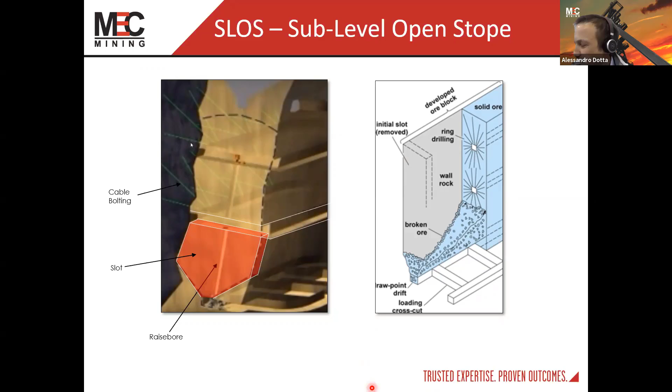So let's go dig a little bit more deep into the method. Let's talk a little bit about the ore body itself. So we expect when applying sub-level open stope to have a stable and competent rock on both the hanging wall and the footwall side of your ore body.

So we're talking mainly about medium to high strength. The strength in that case, we're talking about something higher than 70 MPa, if possible. Also low to medium stress regime, so that will collaborate when you open your stopes and don't have big issues with dilution and also unexpected falling of rocks or even collapsing.

Also, about the deposit angle, we'd like it to be in the ideal range above 60 degrees, and that plays more on the inclination and exceeding your repose angle. So then you don't get into a situation where your ore is partially hanging on your footwall and having issues recovering, because then you could incur not just dilution, but also not have the expected recovery.

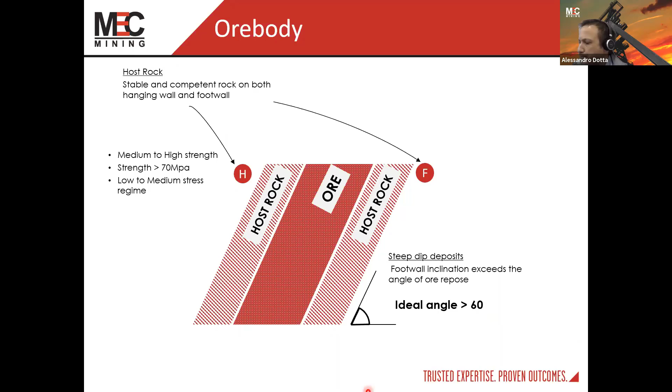So let's talk a little bit now about the ore body. Define a little bit more what we mean about the large size of the ore body. As mentioned, first it's a bulk method. So we expect to have a large ore body with a regular shape and well-defined boundaries as much as possible.

So we're defining here X and Y dimensions, but when we talk about those dimensions, what are the numbers involved? I'd say on the X axis, we're talking about in the order of 100 meters to a kilometer in length. That can vary, you can have multiple ore bodies, it depends on continuity as well. When we talk about the Y position, we're talking about tens to hundreds of meters.

And again, that depends on a couple of factors, but I'd say those should be the main dimensions to understand. The depth of the ore body is variable, because that depends at the end of the day on some geotech constraints and on your rock quality, because that will affect your pillar stability and primary and secondary stope size as well. So that can be said to be variable.

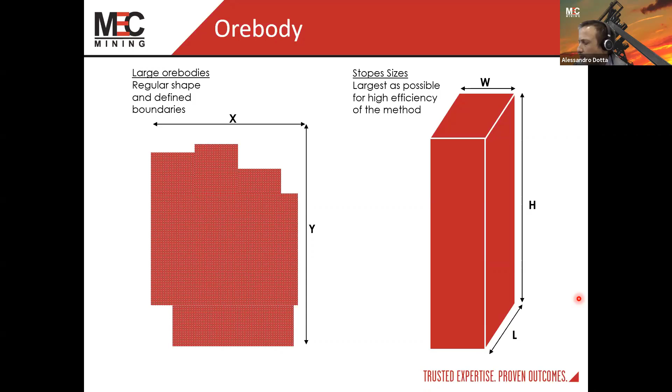But we can talk a little bit about the grade. This mining method you can do with medium and relatively low grade. You should expect dilution, again depending on your stopes, on the paste fill, fallings, or even boundaries. You have some waste and some internal structures.

Also, let me see what else is in here. Yeah, as you go deep with this mining method, we need to mention that your stope size tends to decrease, and that's just a factor of stability.

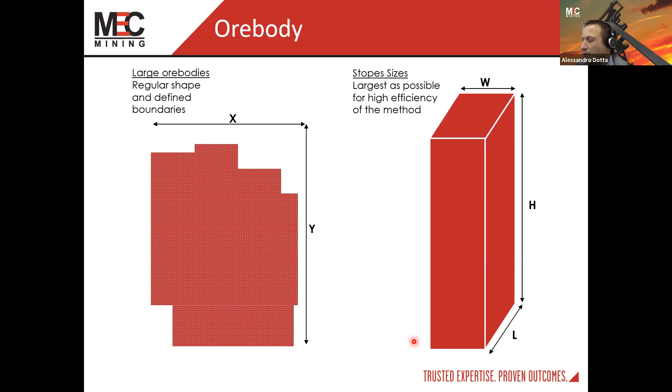So I'll put here a basic view. This is just for us to understand a little bit how the method applies. You'll find out there are a lot of variants for this method. This is by no means representative of the method itself. In the books you have a lot of variants, so you could have different pictures or different applications, but this one represents very well what we want to discuss today.

So initially, we are showing here some transverse stopes. Usually you will expect to have a slow start. So your initial blast on the slot, you're talking about like 1,000 tons or something on that order of magnitude. And as you progress, you have a bigger blast.

As the sequence goes, the method itself is more likely to be applied bottom up, but in reality sometimes you'll be required to do some changes, though that's not common. So then very quickly here, you blast the bottom, blast the top. Of course here it's implied that you have a slot, so we'll see that on the next slides. And then you keep progressing your method.

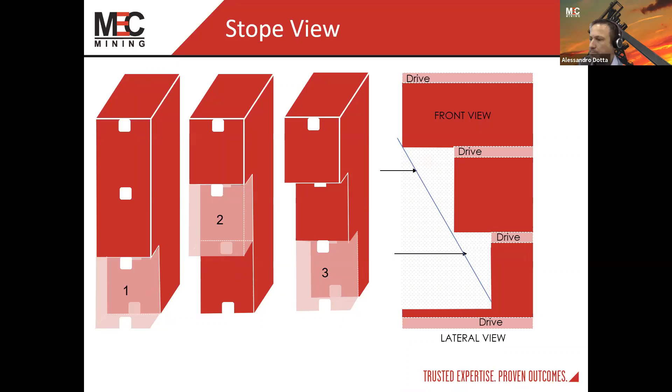What would stop me from going to 2 levels and increasing the height of your block? Look, you can increase the height. There are a couple of factors here, and I would say there could be some geotechnical constraints for having a bigger stope than what's really presented on the picture with multiple levels.

Another factor you need to consider is the drilling. As we go further in our presentation, you'll see that you have a limit. It's not the ideal limit, but I'll put it this way - you don't want too much interference with deviation from holes. But if you want to increase the distance between levels, you could consider a regime of drilling up and down holes. So you could eliminate the middle level and drill up holes from the bottom and down holes from the top. But again, you need to watch out for interactions in your timing and blasting.

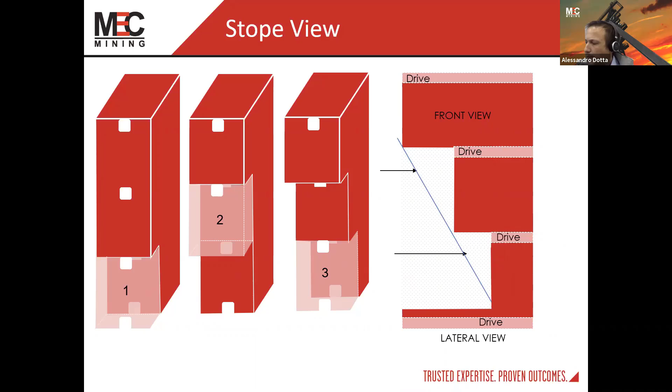Okay, all right, I hope the answer is okay. So let's go to the next slide.

On this one, we present a little bit of the magnitude and size of those slots. This is a real stope that has been mined. As previously discussed, we can see here the size from where you have your raise. In this case, we have one with a raise bore and the slot, so each one of the blasts - blast 1, 2, 3, and 4 in this case.

These are contained at the bottom here. So number 1, and I just have the picture of what's actually contained inside the slot. You see the order of magnitude, we're talking about 1,000 tons, 1,500 tons at most here.

When you go through the next blast, that'll be 5 and 6, you go to an order of magnitude between 18 to 20 times bigger. Again, I'd like to reinforce that the reason for that is because you don't have enough void.

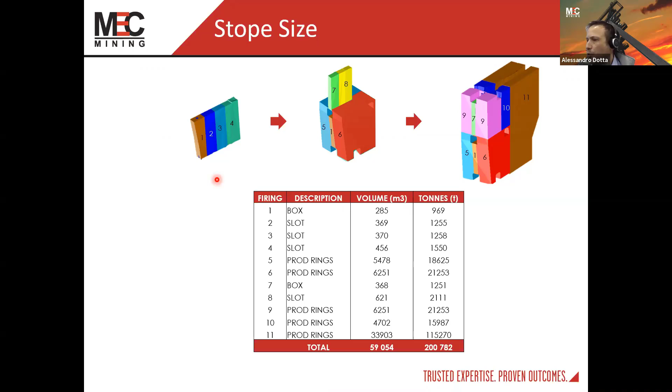So you need to create your void, and you need to be very careful while you create it. We'll be discussing the importance of your slots and how careful you need to be, so you don't jeopardize the extraction of your whole stope. You can have a couple of millions in revenue involved here, so it's better to go slow and respect those constraints than go too quick and jeopardize what's inside your stope, incurring time loss and loss of revenue.

So fire 7 and 8 here could probably be taken as a single shot because we have enough void at the bottom, so we'll be okay. Even 9 and 10 could be taken as a single shot as well. Look at the order of magnitude, we went from 1,000 to 20 times more. Then the final blast, number 11, the mass blast, we're talking about 115,000 tons in a single blast. That's very representative when talking about bogging, mainly free bogging. You can have very high production if you have multiple stopes online.

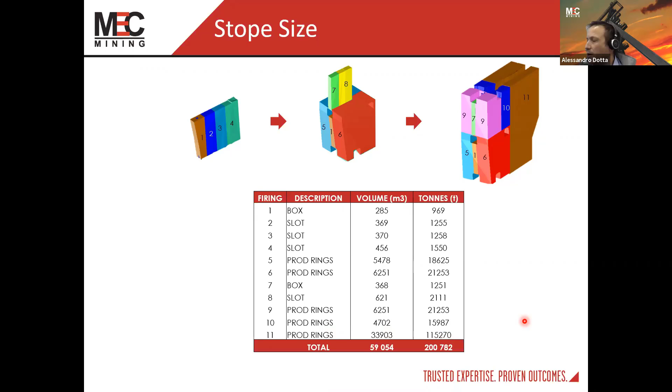Okay, so the next slide, I'll comment a little on the upsides and downsides of the method. On paper everything seems very nice, but sometimes there are things that are undesirable. Let's talk first about the upsides. As I mentioned previously, we're talking about free bogging ranging from 40 to 70% of the stope, depending on size and blasting directions.

It depends on pile formation, how you form that at the back of the stope, or if you push material to the front of the stope. So the stope tonnage, as in the previous picture, can reach easily above 100,000 tons, and that means a relatively low cost per blast. That depends on a couple of other factors. What would be the maximum tonnage? So there's a bit of outstanding ground competence and stability needed, which allows you to have the entire stope drilled before blasting, which is the ideal situation when you want to maximize your drilling stocks and blasting readiness.

Of course, there are a couple of factors to comment on depending on the material, when talking about your broken stocks. If you have high sulfides material, you can incur what people call in the industry 'cooking,' so your material can solidify again and you have difficulties removing it from the stope. But you also need to think about the coordination of the material you have on the ground, about the grades, how you move them to the stockpiles on surface, and how you treat them at the plant.

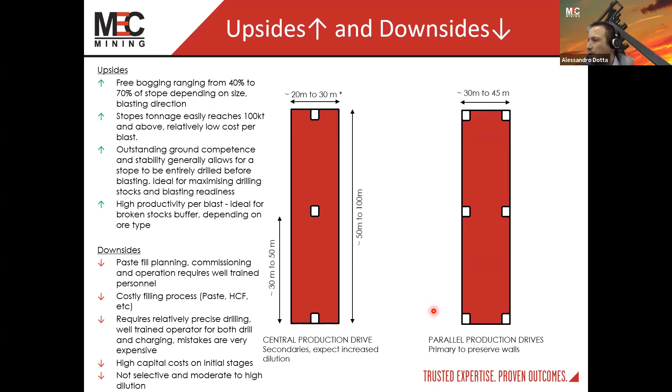So then you can almost double up the size, but not to that extent. It depends a little bit on the angle of your drill hole, but that's the main reason for that. Okay, going to the next one.

Let's talk a little bit about dilution. Dilution can be a really big factor in this mining method application. I'd like to focus on two main things here: the planned and unplanned dilution.

When we talk about planned dilution, we're talking about internal dilution, which we could see as internal waste. The stope shape also has some limitations that bring this internal dilution.

When you're applying this mining method, it's not all the time that we're mining massive ore bodies. Sometimes we're talking about mining multiple structures that carry grade, but between those structures you can also carry waste. That's the reason internal dilution can be a big factor, and you need to pay a lot of attention when talking about this method.

But in some instances, you can have issues with contamination. It's not all the time. Sometimes those boundaries carry some sort of mineral that is a contaminant, and that will not be good during the treating on the plants.

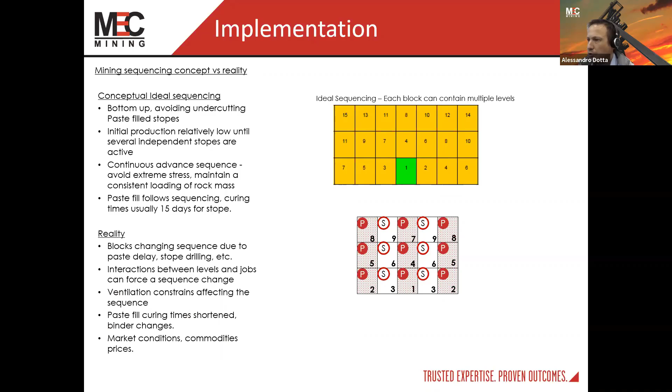Okay, so going to the next one - I'm going through a couple of technical challenges. I'll go a little bit quicker because I think we'll reach 40 minutes, a lot of stuff to talk about. But anyway, let's keep going through this.

So the stope average, we're talking about really about 12 tons per meter. This number, again, can be different - it can be very different, but this is the average between production holes and also slots. When we talk about production, we have about 16 tons per meter of drilling. You can have this number go even higher than that if you consider just your production rings - you can go up to 20 or even over that.

And then you talk more about fragmentation, so you can reduce a little bit how much explosive weight you need per ton of rock blasted. A couple of comments here about some factors regarding up holes and down holes, and that's the reason why I didn't comment on everything back there.

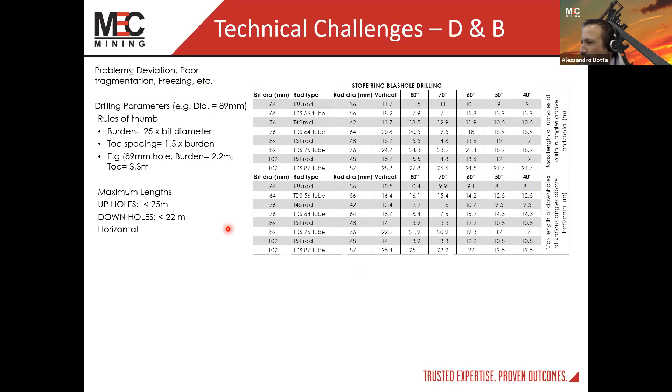But always remember to be very careful and analyze your results as well, your fragmentation, and ensure you're not changing too quickly, because you can go from a perfect shot to a frozen shot. Okay, so let's go to the next one.

So let's talk a little bit about our slots now. We had a question earlier, but let's talk about this one. Slots, to me, are the decisive, paramount step for a successful stope extraction. So my recommendation is really take your time.

A lot of things can go wrong with your slots, so you need to be very careful. First of all, I'd recommend the use of raise bores, as I said before, because then you have your initial void. We usually start with like a 1 meter diameter void in here, which is way better than trying to extract a long hole slot. There are a couple of things to consider with raise bores. Sometimes they're not suitable for certain slot conditions, and if the operation is very confident with long hole raise, that's fine too.

But what I can tell you is that the rate of successful slot extractions and time saving with reslotting and corrections, if you have freezing or things like this, redrilling, it will save you a lot of money. I'd also recommend that if you decide to go with raise bores, really think about raise bore campaigns, planning ahead of your requirements - that will save a lot of money. The mobilization and demobilization is a very costly part of your raise bores, so if you have a campaign pre-planned, you go very well with that. It's also good for your scheduling engineers to avoid interactions with other jobs, like when I'm putting my raise bore here, but geology wants to do some drilling.

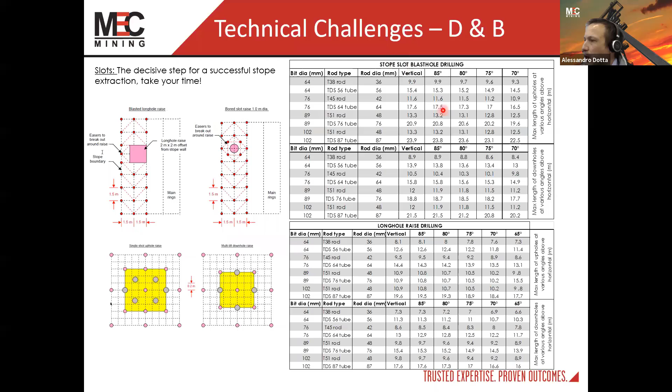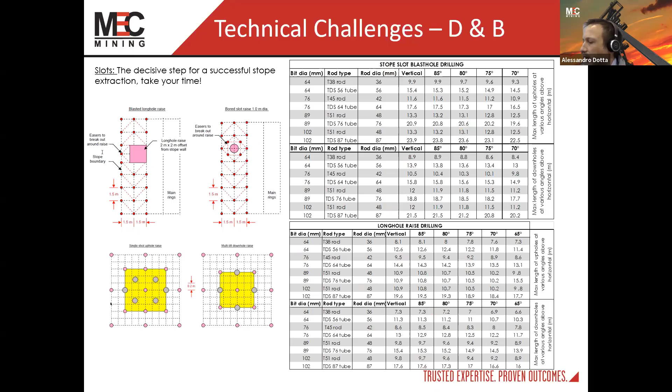So here I have these tables, similar to the previous slide. They just show your slot blast hole drilling and also your long hole raise drilling. I'm not going to go through that in detail because I think you guys can go through it later if you want, just to understand the numbers in here.

Alessandro, we've just got a question from Robert Goose about the hole diameter - what are you looking at when you select your hole diameter? When you consider your hole diameter, I'd say the main factors are your precision drilling and also your stope size. I'd probably mention those two factors.

If you increase your hole diameter, you have more bang, a little bit more power blasting, but you also need to understand the damage that you can cause to your walls, adjacent stopes, and your paste. So you need to be careful and understand the impacts. Bigger holes allow you to have a bigger burden distance, so you can push more material forward, and also you have fewer holes with a bigger toe spacing. So you have all those factors to think about.

Also, bigger holes will allow you to have a bigger distance between levels, because you can drill a little bit further with less deviation. So I consider all those factors really, but I'd say it's a mix between all of them, to understand where you want to go. But I'd say this analysis starts mainly with your distance between levels, which impacts your stope size, which will be defined by your geotech when you're doing your initial projects.

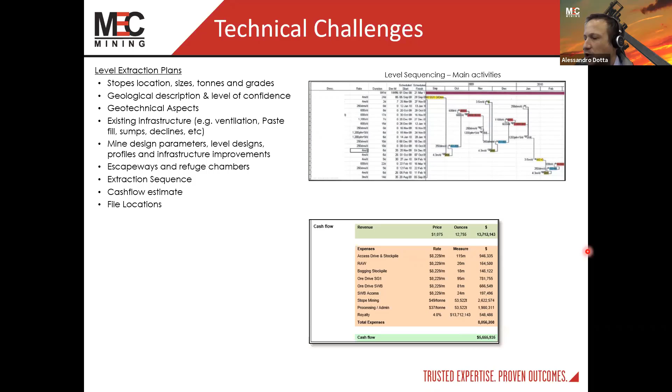Also, it's always good, and this is one that a lot of places sometimes don't do, but I consider very important: cash flow estimate. I'll put one here. It's very basic, but understanding how much money you're spending through the process, how much your stope was really worth, and how much you ended up with in cash at the end. That's very important.

Any questions so far here? Can I keep going? All right, I think keep going, Alessandro. We'll just get the questions at the end.

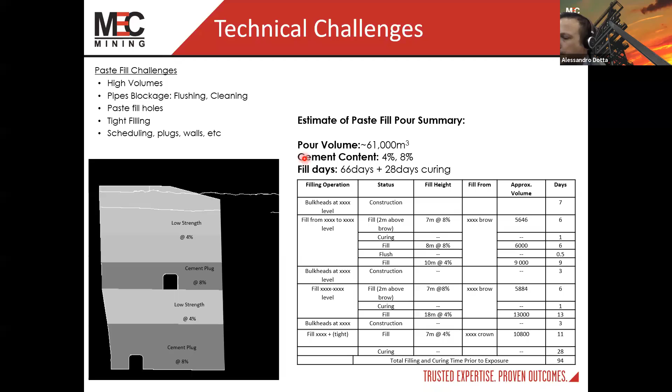Okay, beautiful. So let's talk a little bit about the paste fill. I'll try to go a little bit quicker because I'm not a geotech, but anyway, I'll try to present what I know.

So we have some paste fill challenges, and I'll mention a couple of them. Mainly, dealing with high volumes of paste. In this case, we're dealing with 61,000 cubes. A paste fill plant can go from 1,000 cubes to a couple thousand, maybe 3, somewhere in that range. So you can imagine how long it takes. And sometimes you can realize if you made a mistake on your project, because that would take a long time to paste fill your stope.

Pipes blockage. This one is a classic for everybody working at a mine site with paste fill. If flushing is not done correctly and at the right times, you end up with sediments inside your pipes, and they solidify, and then you have a pipe blockage, which is very painful. For metal pipes, you need to remove them and find your way to remove the material inside. At the end of the day, it means taking down all your pipes, usually attached to the backs of your drive, and physically cleaning them, which takes a lot of time.

Also consider your paste fill holes as well. They can be very challenging, mainly when we talk about tight filling, which is another topic. The position to drill those holes is not always the best, because you need to consider where your paste fill pipes are. So sometimes you need to extend your reticulation for paste filling, which is very challenging in some operations.

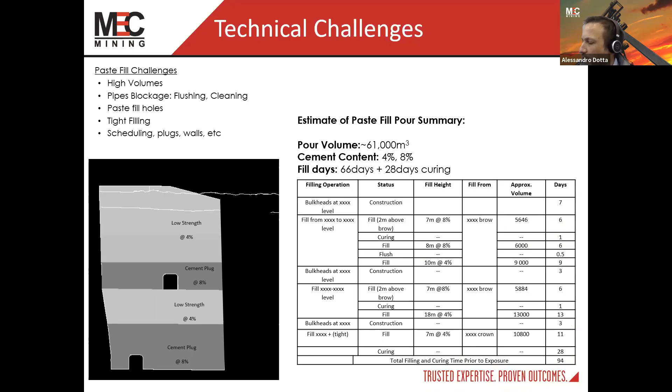On the side here, I just put a little table. I intentionally removed some of the names because it's from a real operation. I have some dates here showing how long it took, and you can see it can take quite a decent amount of time—this one, 94 days, pretty much 3 months for really big stopes. This number usually improves as the operation goes; you get a way smaller number later, but as you start, you often get numbers that seem very high.

And that's it, that's the end of the presentation, that was the last slide. I hope everybody liked the presentation. It's a lot of information to be delivered, I tried my best, but anyway, I'm open to questions now.

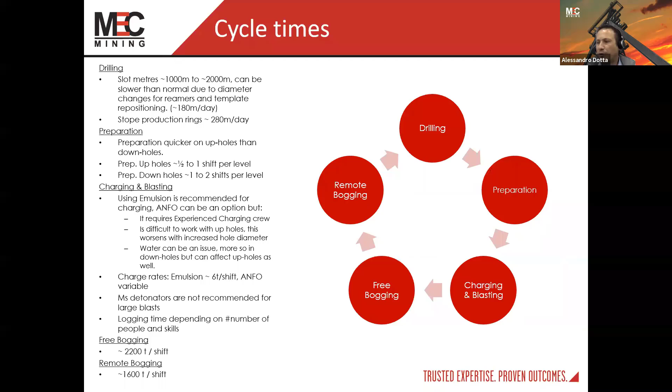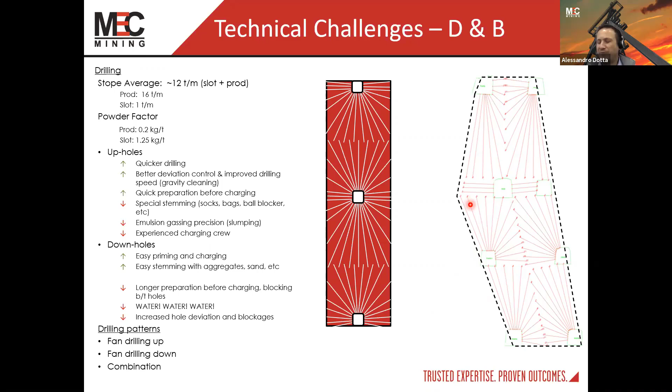But when you have parallel drives, it's more like this case, and you can actually cable the walls. I would advise cabling the walls, because that means you can have even bigger stopes in that sense, and prevent further dilution. As for these structures here, the more cable you have on the walls, in some instances you're preventing those rocks and dilution from ending up inside your stope.

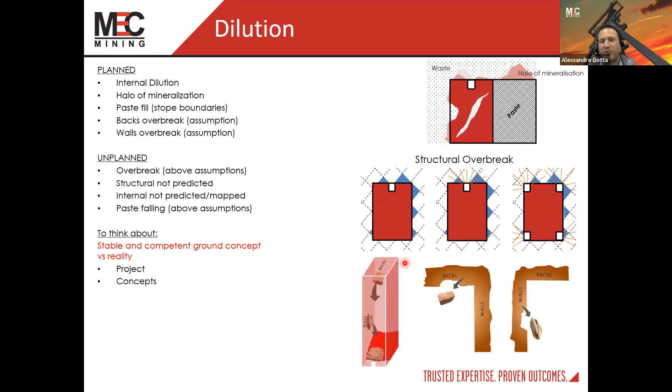I think we might make this the last question. Plenty of mines have stopes that are intersected by ventilation shafts in their ore reserves. Can you comment on the practicality of that?

If you have a ventilation shaft, first of all, when you plan one, you need to check very well about sterilization, and that's not just for ventilation shafts, it goes for all main infrastructure in your mine. You need to be very careful not to put declines, ventilation shafts, or any long-term structures required for your mine's proper future work inside of ore. If you want to mine that stope, you need to consider how this shaft plays with your ventilation, how it would really affect things, and whether there's any other way to put a shaft somewhere else that links and does the job this shaft is doing.

You also need to include the cost of moving this shaft to another place. Otherwise, it can seem like a really good deal, but you end up with a very expensive shaft to relocate. I would also consider whether there's a way to reverse my ventilation, if it's not a very important shaft and just feeds an area with fresh air, or it's an air return or something like that.